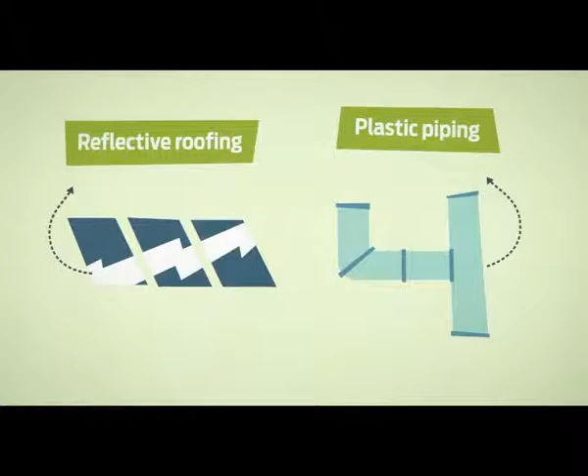In high-growth regions, buildings' energy use will increase by 2050. So improving the energy efficiency of buildings is vital for reducing greenhouse gas emissions. Products that depend on chemistry can enable significant reductions in energy use and greenhouse gas emissions in the building sector.

For example, energy-saving products installed in homes in the United States prevented nearly 252 million tons of CO2 emissions in 2010. Studies show that if this trend continues, more than 7 billion tons of emissions can be avoided by 2050 in the US alone. In the European Union, energy-efficient building products could create emission savings in homes of more than 13 billion tons by 2050. In Japan, more than 450 million tons of emission savings in homes is achievable in the same time frame.

The global chemical industry is working on a roadmap to meet these ambitious goals. This roadmap will help chemical companies and policymakers work together to help ensure these savings are realized by 2050. So the chemicals industry not only provides the products and technologies to reduce greenhouse gas emissions today, it is also working on solutions for even more energy-efficient buildings tomorrow.

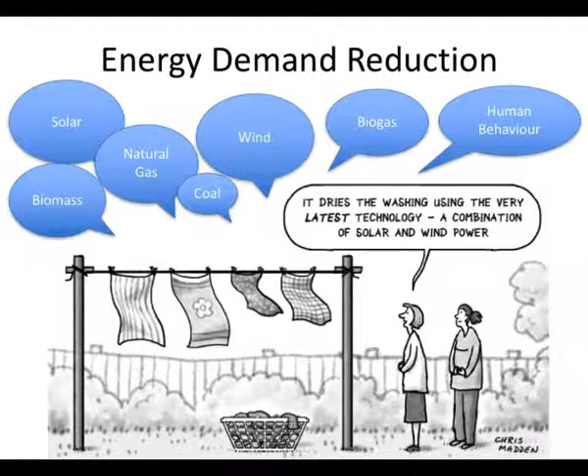You wouldn't put up with a dripping faucet in your house for very long, so why put up with the same thing happening with your home's energy? If you're like most people, you've got lots of little energy drips happening all over your house, which together can add up to a lot of energy and money being wasted.

75% of the energy used by your computer happens when there's no one in front of it. How's that for an energy drip? Properly setting your computer's power management could save you about $33 a year.

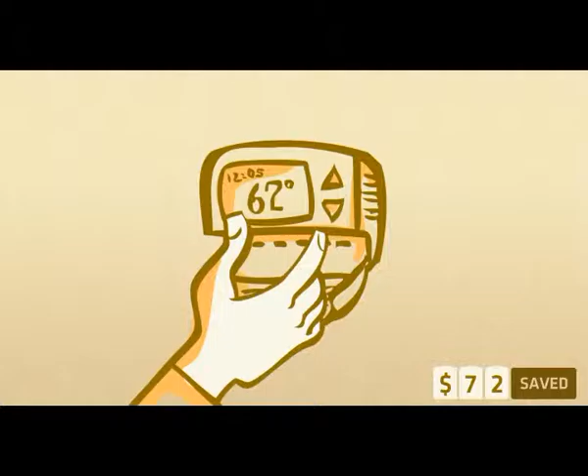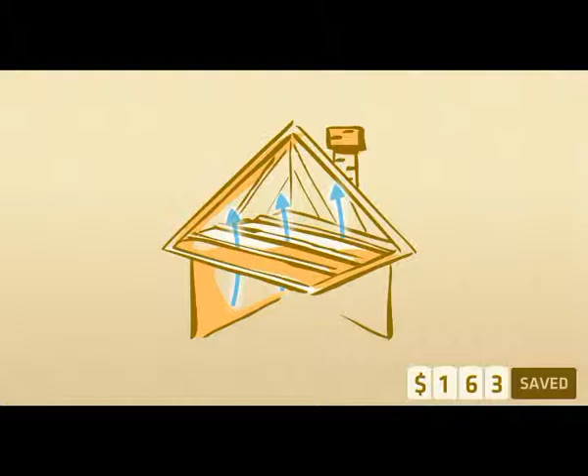Using a programmable thermostat is another great way to lower your energy costs. Just set it and forget it for a cozy home with lower monthly bills. If your house isn't properly air sealed, that's a huge energy drip, and it's probably the cause of those dreaded ice dams on your roof. Keep that air inside where it belongs by sealing leaks going into your attic and properly insulating. You'll increase your home's comfort and save a bundle.

That ancient appliance? Talk about an energy drip. If it's old enough to vote, it's time to think about replacing it with an energy-efficient model that can actually save you money in the long run. Fixing these energy drips in your home could save you about $575 per year.

Multiply that by the number of houses in your neighborhood, by the number of neighborhoods in your town, by the number of, well, you get the idea. Keep your money where it belongs. Fix your energy drips and turn the sound of dripping into...

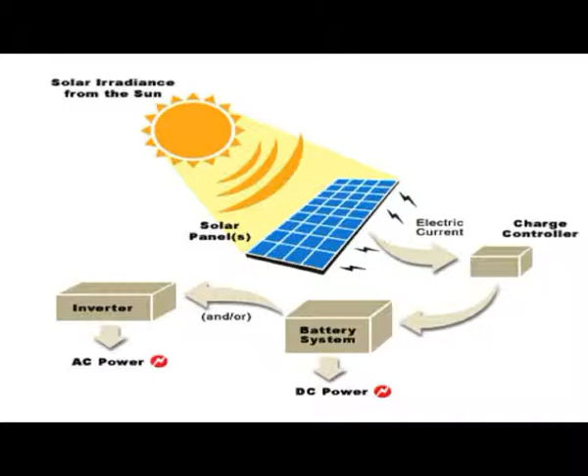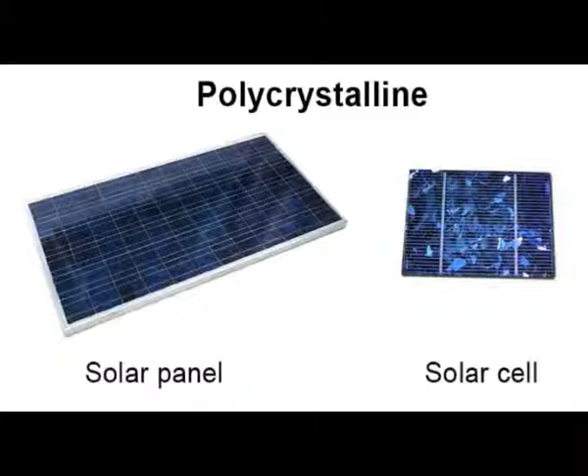The most popular EagleSun system, called a drainback system, can be used in any climate and requires no maintenance. Heat from the sun is collected by the solar panels mounted on the roof. The heat transfer fluid, usually water in a drainback system, is pushed by a circulation pump up to the collector, where it is heated as it moves upward through copper tubes in the collector.

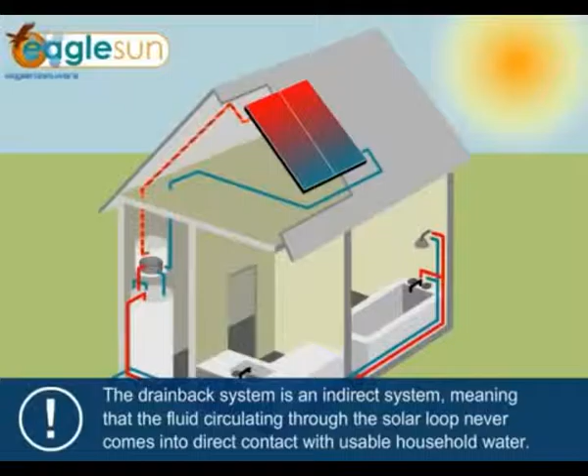Once heated, the fluid exits the collector and circulates down to the drainback reservoir. The drainback system is an indirect system, meaning that the fluid circulating through the solar loop never comes into direct contact with usable household water. Heat is transferred to the main water line using a heat exchanger, and it is then stored in the tank and made available for use.

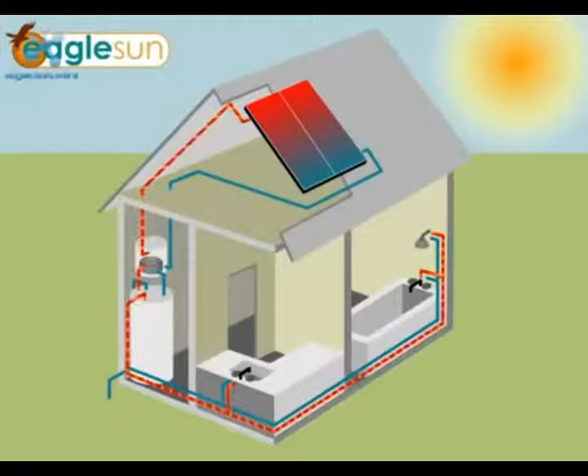An EagleSun system will allow you access to enough hot water to wash your dishes, do your laundry, and enjoy hot showers for free all year long. To calculate your own personal savings, click the Solar Savings Estimator link located on any page.